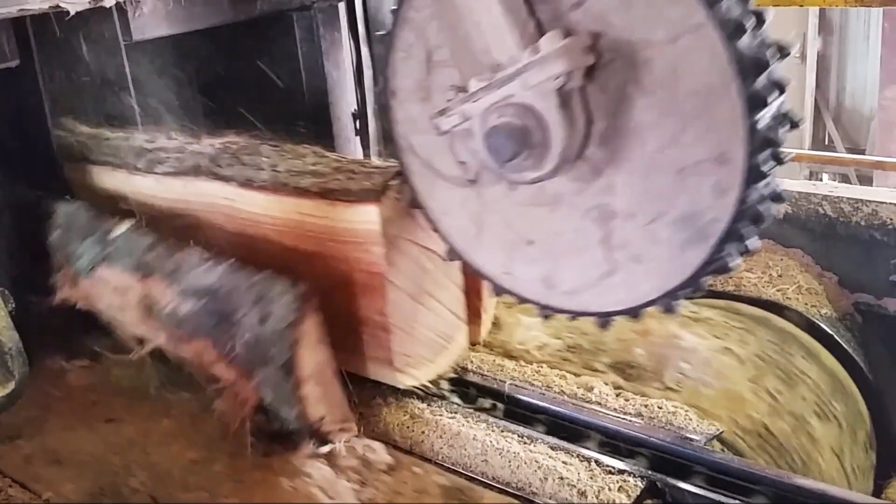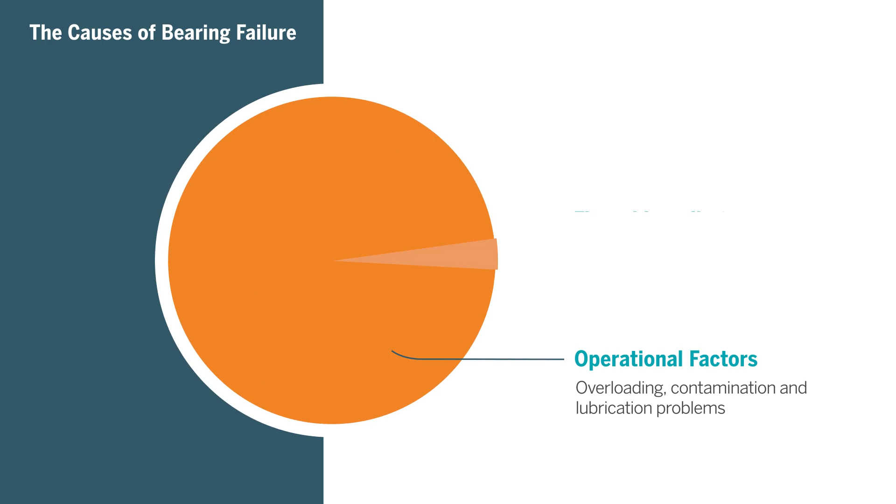Only about 10% of bearings reach their calculated lifespan. Grease is used in 90% of bearing applications. Most premature failures are caused by lubrication problems. This is an obvious concern. These statistics show that grease bearings rarely reach their design life.

If the number one cause of premature bearing failures could be eliminated, and in doing so, save time and money, what would this do for you?

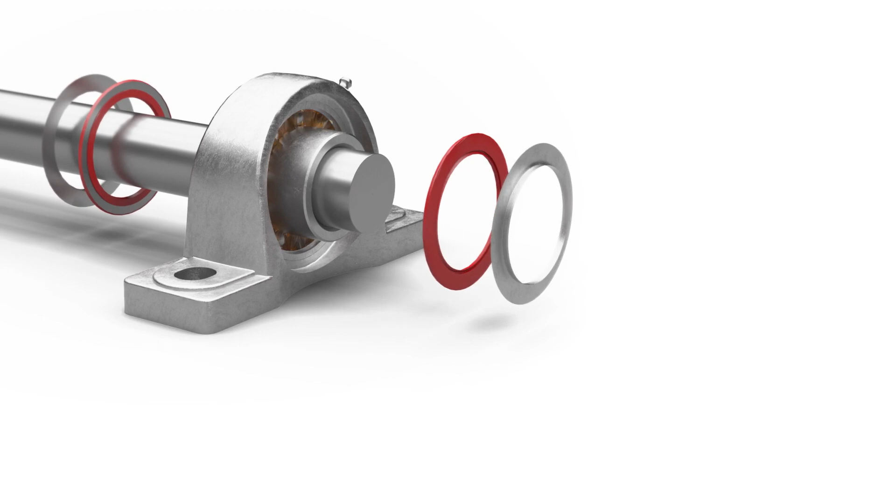Bearing lubrication is easy to get wrong. It's impossible to know how much grease is in a bearing at any given moment, due to shields or seals obstructing the view. The condition of the grease is dependent on several variables.

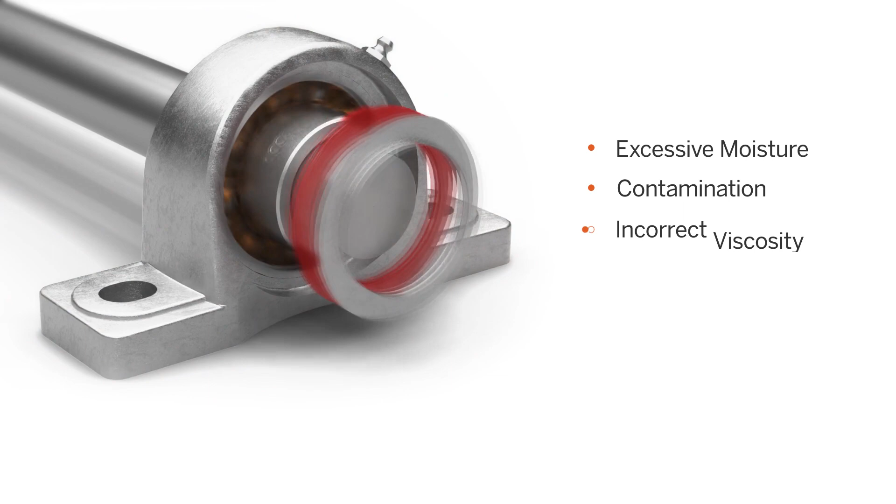Situations involving excessive moisture, contamination, incorrect viscosity, incompatibility, or running a bearing that has been over or under greased leads to 80% of premature bearing failures. How much time and money could be saved using a bearing that eliminates these concerns?

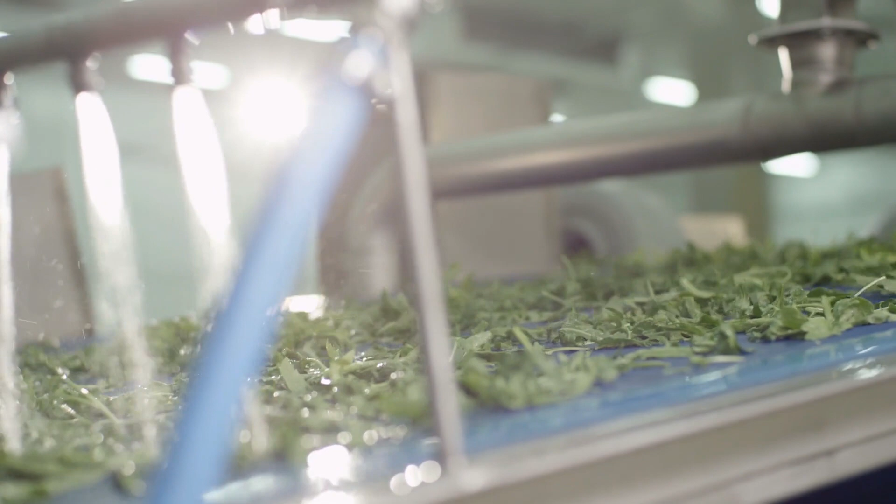Bearings in severe applications require even more robust and specific lubrication methods. Food-grade greases used in washdown applications have zero margin for error due to accidental contamination requiring stoppages or resulting in product loss. Hard-to-access locations can create additional maintenance problems.

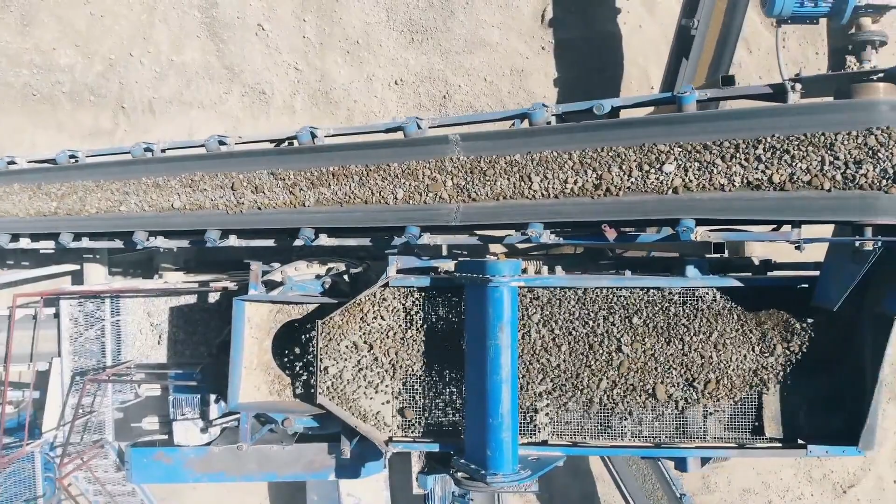Needing lift equipment or having to disassemble machinery to service a bearing creates downtime that affects the bottom line. Additionally, bearings in dangerous-to-reach locations are safety hazards for maintenance personnel. Regardless of a bearing's location, proper maintenance is necessary to avoid failure.

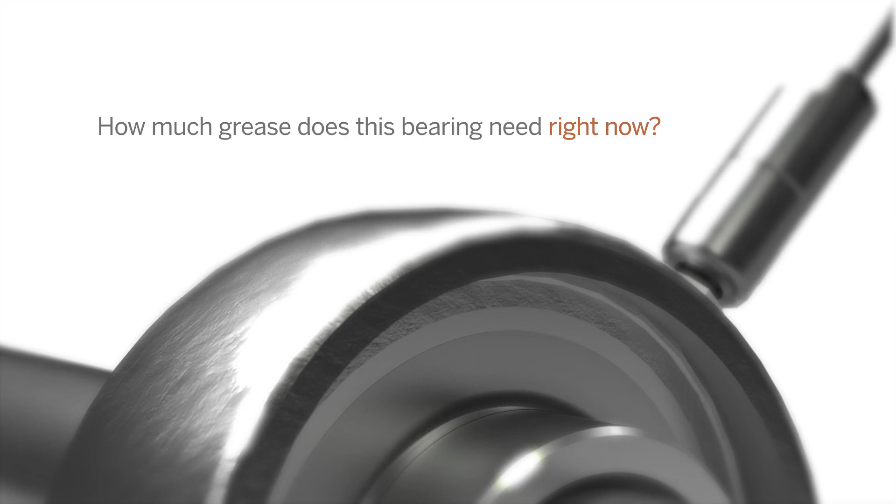Optimal bearing function is reliant on the user to get the lubrication process right. Even the most experienced maintenance technicians sometimes have only their best educated guess. How much grease does this bearing need right now? Will this bearing have enough grease by the time we relubricate? Has the grease within this bearing been compromised?

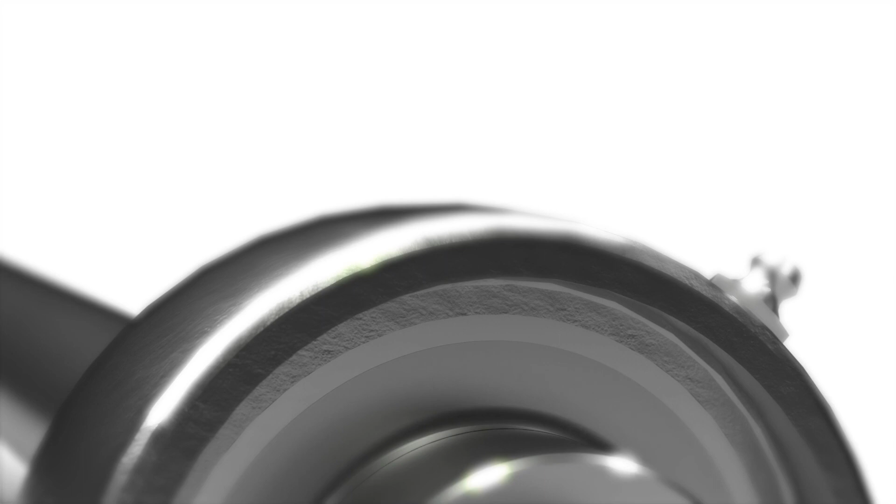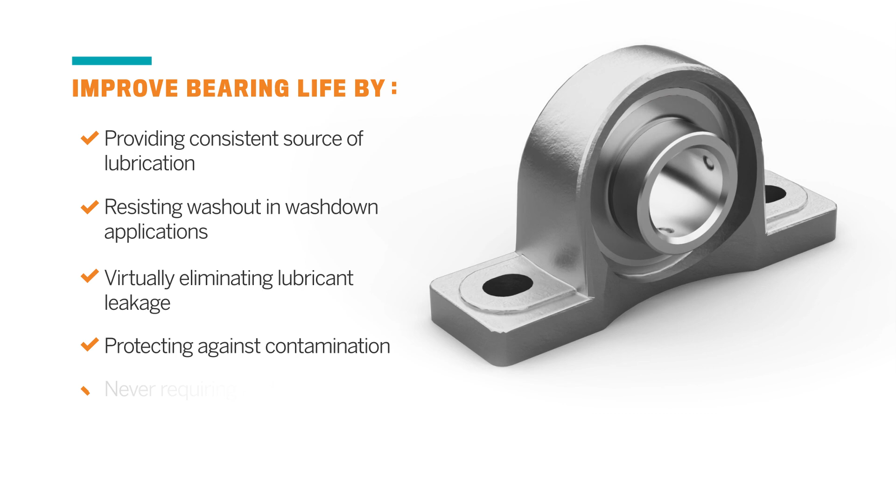What if all these problems could be addressed by a single solution? A solution that improves bearing life by providing a consistent and reliable source of lubrication, resisting washout in washdown applications, virtually eliminating lubricant leakage, protection against contamination, and never requiring additional lubrication. The solution is permanent lubrication.

Permanent lubrication is an oil-saturated polymer material. When it's molded into the interior of the bearing, it fills all internal space without impeding the rolling elements.

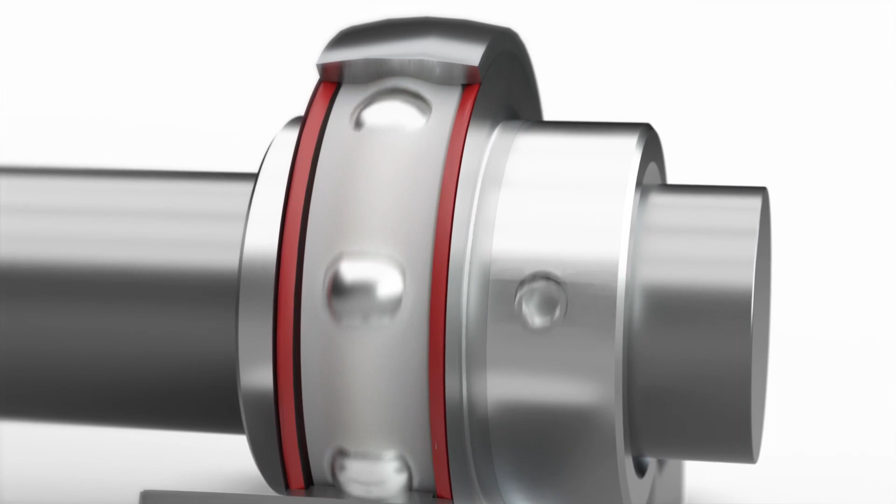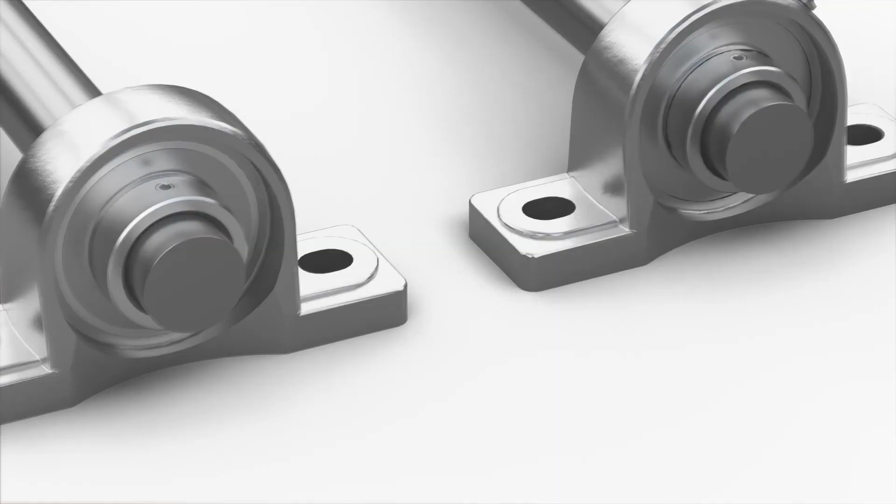Micropores, as small as 1/10,000th of an inch within the polymer, release oil during operation and reabsorb it when the bearing is not in use. Permanent lubrication can hold up to 4 times the base oil as most grease bearings, which allows for longer lubricant life and a maintenance-free bearing.

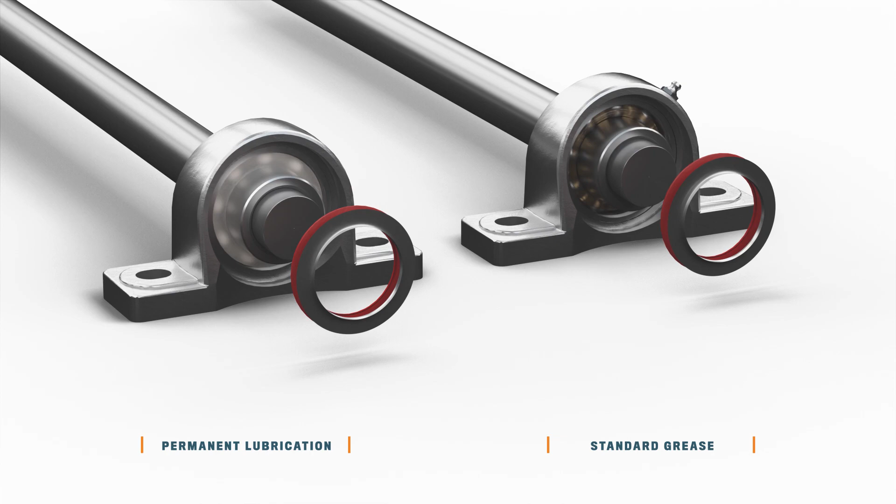This effectively takes the guesswork out of lubrication. And with oil retention being very high, resulting in almost no loss over the course of bearing life, the interactions with these bearings are limited to installation and replacement.

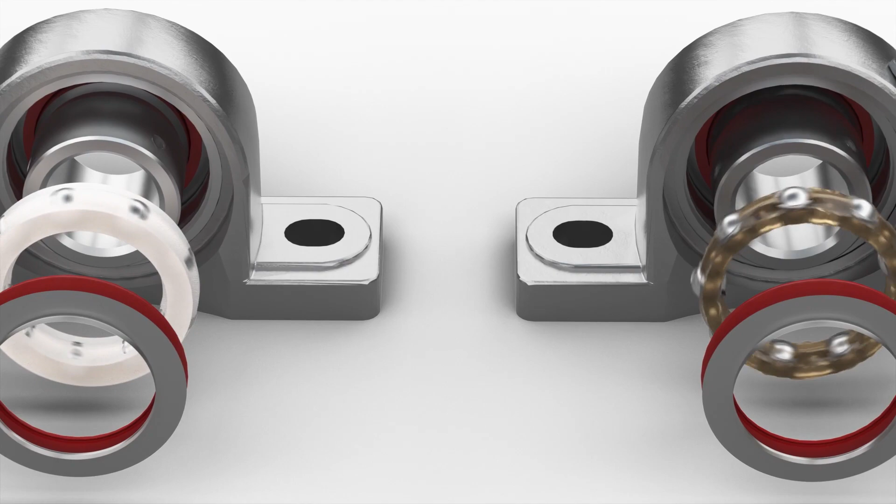The polymer, which completely fills the interior of the bearing, also acts as a seal. In a standard greased bearing, anything introduced into the interior of the bearing will be circulated with the grease. Not ideal for the rolling elements, which can be damaged as they roll over contaminants repeatedly.

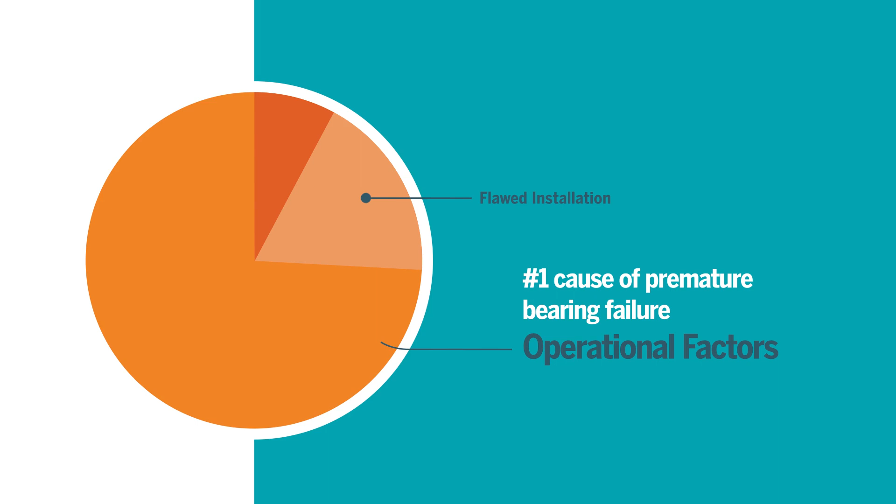The polymer significantly reduces the potential for foreign particulates becoming a cause of failure. The polymer also maintains its form during intense washdowns, protecting against the ingress of water or cleaners and washout of the oil. Permanent lubrication allows original equipment manufacturers to add consistency to their product through the removal of the human element.

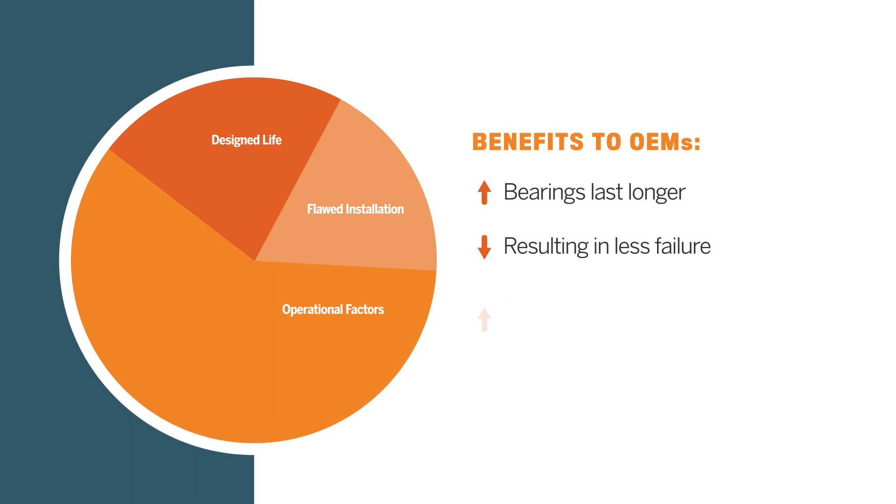By maintaining consistent lubrication, bearings last longer, resulting in less failure, increased customer satisfaction, and reduced warranty claims.

Introducing LubriLife, the new permanent lubrication solution from Baart. LubriLife is a game changer for the bearing industry.

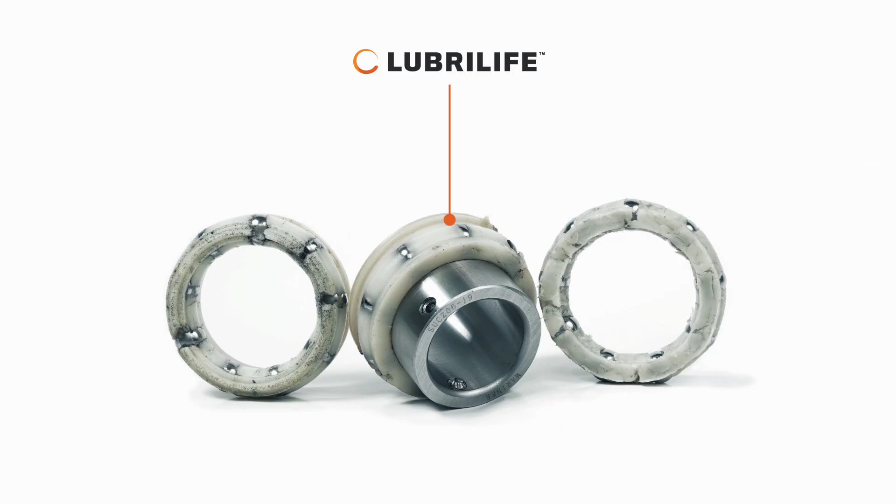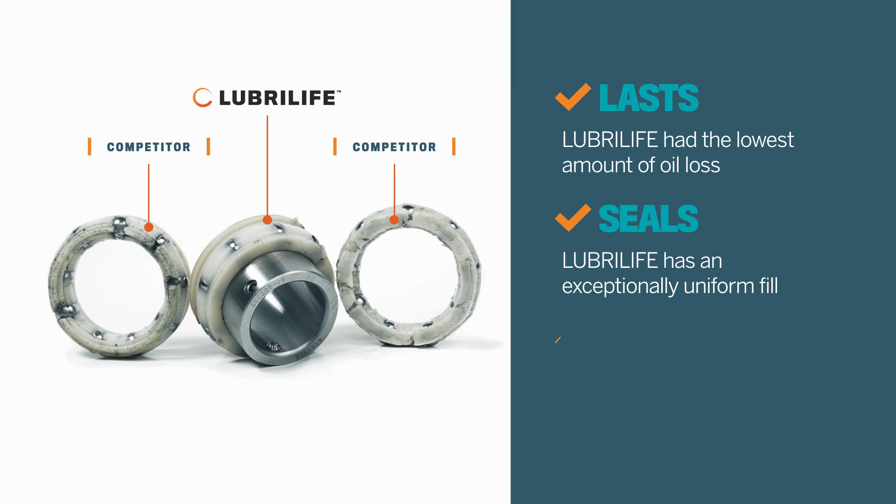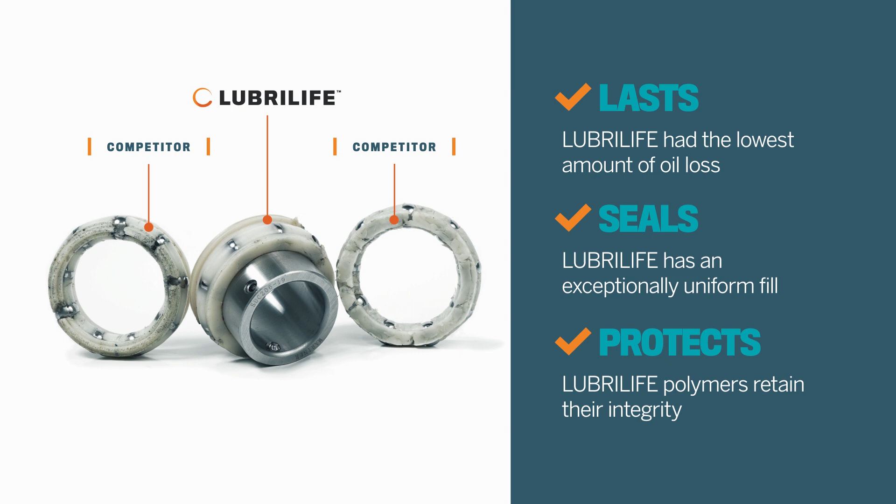LubriLife was tested against other permanent lubricants offered by 2 of our competitors. Here's what we found. LubriLife had the lowest amount of oil loss in the group, indicating excellent longevity. LubriLife has an exceptionally uniform fill, allowing it to excel in washdown applications. LubriLife polymers retain their integrity, which helps resist seal deformation in even the most punishing applications, performing the best in eliminating contamination issues.

We're pleased to offer this product to our loyal Baart customers. LubriLife is available in many of our Axis, Mariner, and Turner bearings, with either standard or food-grade options.